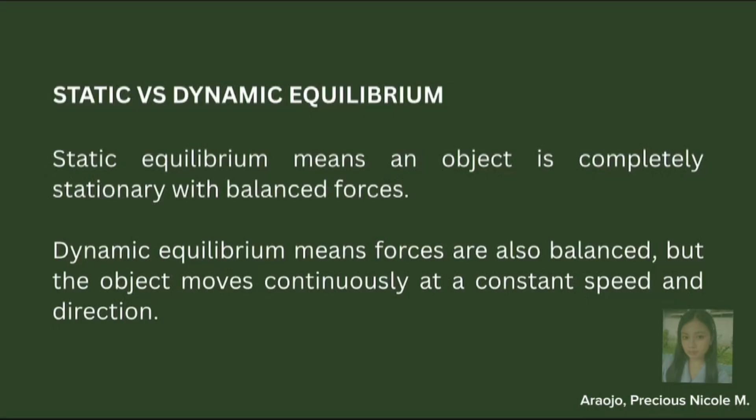While dynamic equilibrium describes an object that keeps moving in a steady way. All forces balance exactly, but the object travels with constant speed in an unchanging direction, like a car running at fixed cruise control or an elevator moving smoothly between floors. From a more detailed perspective, dynamic equilibrium is a balanced state where the vector sum of all applied and resistant forces equals zero. It is written as summation of forces equals zero. The result of this is zero acceleration, but velocity stays constant, meaning the object keeps moving steadily. It doesn't speed up, doesn't slow down, or drift sideways. Think of it as moving in perfect balance, unlike the common misconception that equilibrium means stop.

Then, translation means every single point in the rigid body follows identical and perfectly parallel straight paths. Here, the shape of the object doesn't bend, doesn't twist, and doesn't tilt. The angle between any two marked lines stays exactly the same. So the angular velocity and angular acceleration are both zero. In other words, when moving fast, the whole object shifts rather than spins. So what's the connection between the two?

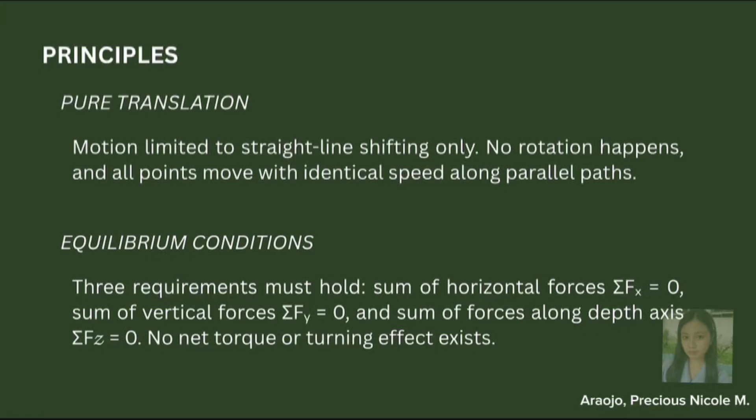Now, let's talk about the relevant theories, starting with the most basic idea. Newton's first law of motion or inertia explains how things move naturally. It tells us that any moving thing will keep going straight at the same speed unless something pushes or pulls it to change. In equilibrium, this means when the forces are perfectly balanced, the motion stays steady in ideal conditions, just like how a car stays at cruise speed when push and drag cancel each other out.

Moving deeper into how motion changes, this is Newton's second law of motion, which connects how hard you push to how much it speeds up or slows down. This means when the total push or pull equals zero, the acceleration also becomes zero. Or to make it easier to understand, this is the summation of F equals mass times acceleration. Now, it's clear that when the forces balance exactly, the speed and direction never change, forming the solid foundation for all equilibrium rules we use in analysis.

Aside from Newton's law of motion, there's also what's called D'Alembert's principle, wherein this principle bridges the gap between moving and stationary problems. It introduces a simple trick: treat the object's natural resistance to speeding up or slowing down like an extra force acting backwards. Once you add this imaginary force called the reversed effective force or REF, accelerating bodies act just like they are in static balance.

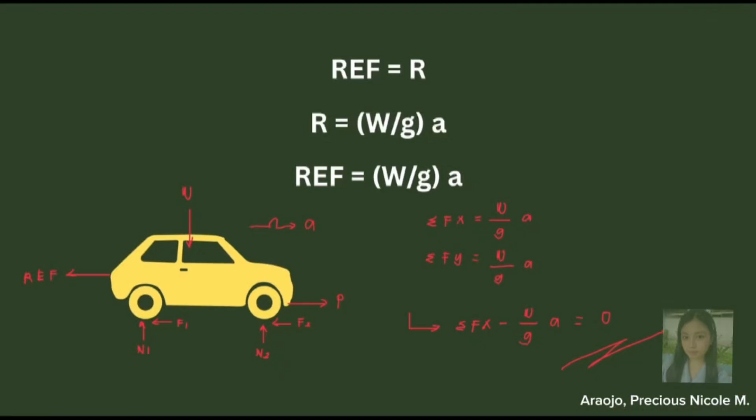So what we do is take all the horizontal forces, including the REF. Since it's to the left, it's negative, and we equate it to zero. This proves it's a dynamic equilibrium. As the slide says, by having an REF, the system can now be analyzed using dynamic equilibrium: summation of Fy equals 0, summation of Fx equals 0, and summation of moment equals 0.

So here are the steps and formulas. First is to draw the free body diagram or FBD. Second is to solve for the REF, or W over G times A, when it's not given. Lastly, use the dynamic equilibrium equations: summation of FV equals 0, summation of FH equals 0, and summation of M equals 0, which are vertical, horizontal, and moment.

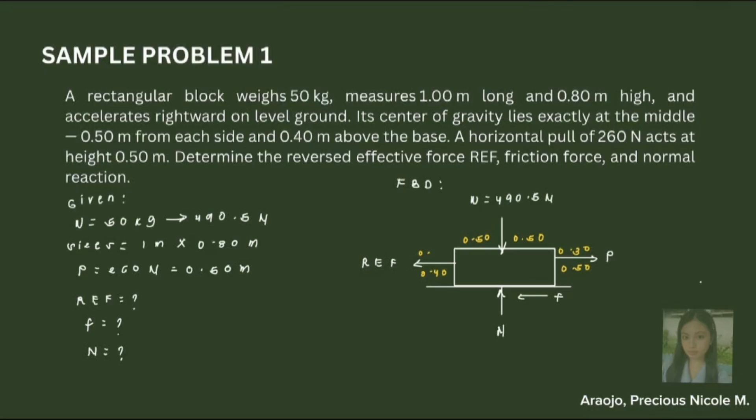Nasa gitna yung weight, so 0.50 tsaka 0.50 magkabilaan kasi 1 meters long. Itong REF, nasa gitna siya, so tig 0.40 sila. Ayan, pwede na tayo mag-solve.

Ang unang hinahanap dito ay yung reversed effective force o yung REF. Pwede natin gamitin dito yung summation of moment sa left side. So 260 times 0.50 meters minus yung REF, kasi pa-left, times 0.40, minus 490.5 times 0.50, equals to 0. REF equals to 288.13 newtons.

Pwede na natin makuha yung sunod, which is yung friction force, by using the summation of forces horizontal o yung summation of Fx equals to 0. Assume natin na to the right is positive. So 260 minus 288.13 minus yung friction na unknown equals to 0. Lipat-lipat lang natin, friction is equals to 28.13 newtons.

Lastly, yung normal reaction. Pwedeng-pwede natin siyang makuha kasi dalawa lang naman yung given na vertical forces. Assume na lang natin na upward is positive. Yung N, ima-minus natin siya sa 490.5 na weight equals to 0, lipat lang. So N is equals to 490.5 newtons.

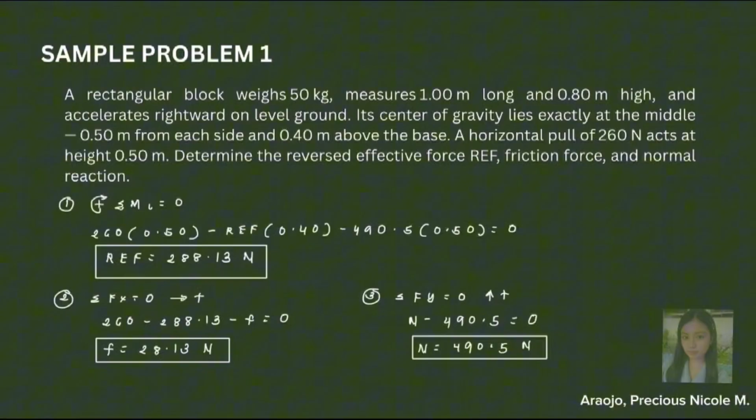For problem number 2, a uniform square block has a mass of 15 kg, is connected with a wire to another uniform square block, twice as the mass of the first and of the same material, as shown in the figure. Load P is applied to the 15 kg block to make it traverse a certain distance. The coefficient of friction of the big block is 1.5 and 0.75 for the small block.

Calculate the tension and REF. First, i-analyze muna natin yung question. Ang sabi dyan, yung first na uniform square block, ang mass niya is 15 kg. Then yung second block is twice as the mass of the first block.

Magkakaroon tayo ng equation. Let's say, ang symbol ng first block natin is MS, at ang symbol ng second block natin ay MB for the mass equation. Ang magiging equation natin dyan is mass ng small block times 2 is equals sa mass ng big block.

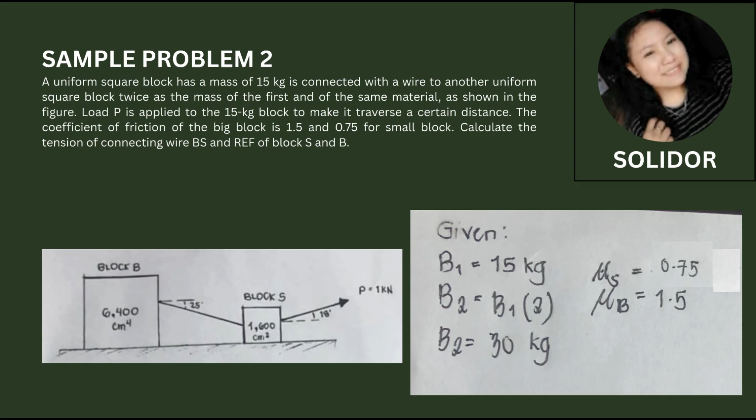Ang next natin gagawin ay yung FBD ng kada object. Unahin muna natin yung FBD ng block S o ang smaller block. Makikita natin dyan na may tension ng wire na pa-left, may 25 degrees. At meron ding load P na papunta sa right na may 18 degrees.

Dahil pa-right yung direction ng load P, ang magiging movement din is pa-right din. Ang acceleration nun is also pa-right, same direction with the load P.

Frictional force is opposite to the movement of the object. So, it's pointing left. And then, we can also see the weight of the block itself, which is pointing down. And then, the normal force is pointing up.

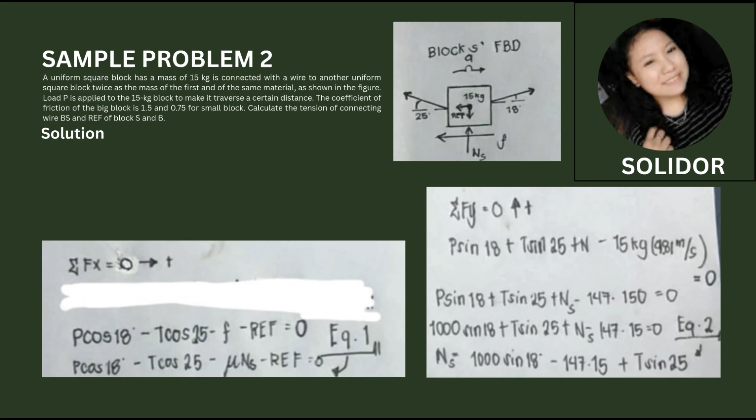Before we finalize this as equation 2, we can move out the other terms and leave the normal force. So this becomes: normal force equals 1,000 sine 18 degrees minus 147.15 plus T sine 25 degrees. That's our equation 2.

Now we can substitute equation 2 into equation 1. But first, recall that friction equals mu times normal force. Since equation 1 has friction in it, we substitute our equation 2, which is the normal force, 1,000 sine 18 degrees minus 147.15 plus T sine 25 degrees, into equation 1.

Our equation becomes P cosine 18 degrees minus T cosine 25 minus mu times (1,000 sine 18 degrees minus 147.15 plus T sine 25 degrees) minus REF equals to 0.

So we can simplify this term by term. We multiply first, and after computing what needs to be multiplied, what we get in the end is: REF equals 829.6563 minus T sine 25 degrees... T cosine 25 degrees minus 0.75 T sine 25 degrees. So that's our final equation for the FBD of our small block.

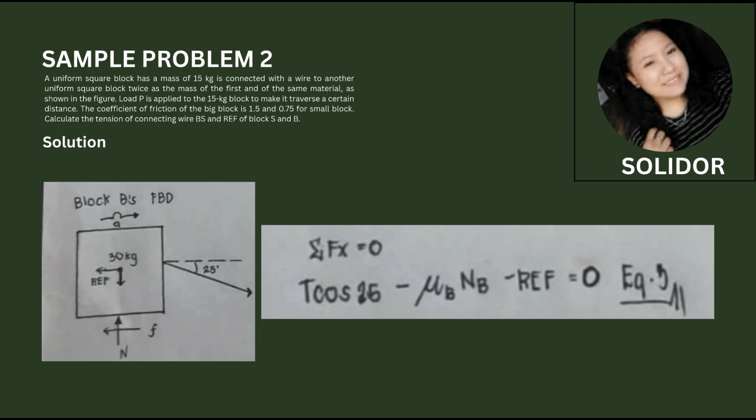Summation of forces horizontal equals to 0, right? Positive. So our tension is to the right. So, T cosine 25 degrees, cosine because it's attached to the horizontal. And then, minus friction, which is to the left, so negative. Then minus REF, because it's opposite, then equal to 0. Let's break down the formula for friction, which is mu times normal force. So that's our equation number 3.

Summation of forces vertical equals to 0, upward positive. Negative T sine 25 degrees, negative because the tension is downward. Plus normal force, because it's upward, so positive, minus the weight of the big block itself, which is 30 kg times 9.81 meters per second squared, equals to 0.

Let's simplify, moving the tension and weight to the other side. The normal force becomes equal to 294.3 plus T sine 25 degrees. That becomes our equation 4.

Now let's substitute equation 4 into equation 3. The equation for normal force we got from equation 4, we place into equation 3. Let's break down the friction in equation number 3 — that's mu times normal force — so we place there the normal force from equation number 4. So, T cosine 25 degrees minus mu times (294.3 plus T sine 25 degrees) minus REF equals to 0.

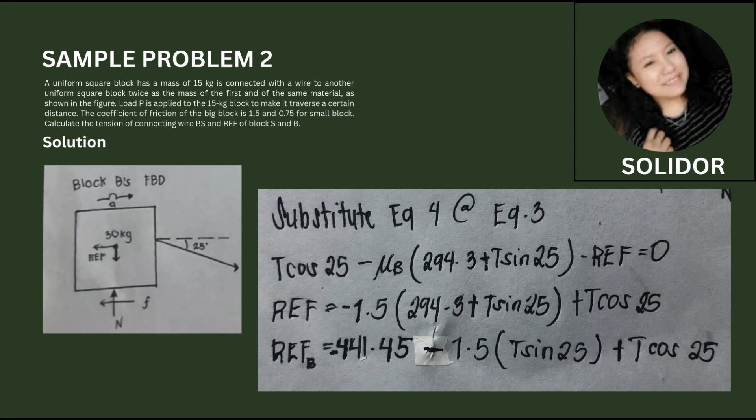Then, simplifying, the equation we get for REF of block B, or the big block, is: REF equals T cosine 25 degrees minus 441.45 minus 1.5 times T sine 25 degrees.

And then, yung nakuhang REF equation sa small block and yung REF equation sa big block, i-equate natin yon. I-simplify natin to get the tension.

So, equate mo natin. 829.6563 minus T cosine 25 degrees minus 0.75 T sine 25 degrees is equals to negative 441.45 minus T sine 25 degrees times 1.5 plus T cosine 25 degrees. And then, simplify, plug in sa calculator, ang makukuha nating value ng tension ay 849.8678 Newton.

Ayan, meron na tayong tension. Nakuha na natin yung value ng tension. So, pwede na nating substitute yung value nun sa mga REF equation kanina.

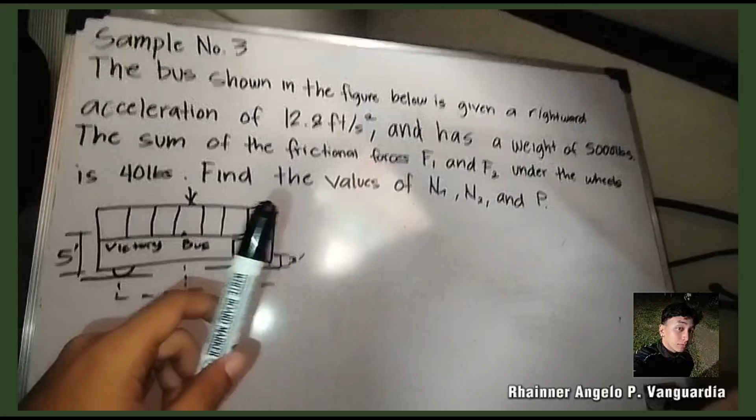So, the sample number 3 is the bus shown in the figure below is given a rightward acceleration of 12.8 feet per second squared and has a weight of 5,000 pounds. The sum of the frictional forces F1 and F2 under the wheels is 40 pounds. Find the values of normal force 1, normal force 2, and force P.

So, this is our figure. First, our acceleration is 12.8 feet per second squared. That's one of the givens. And our weight is 5,000 pounds. And the frictional force of F1 and F2 under the wheels is 40 pounds.

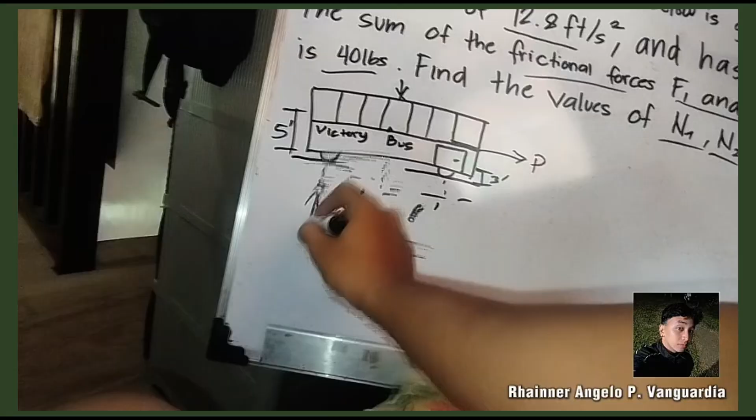So what we're going to find is the values of N1, N2, and force P. So, ang hinahanap dito is yung force P, and the normal force here, N1, and normal force 2, N2.

So first, we're going to write the given, so we can answer it carefully. So now, I will be writing the givens.

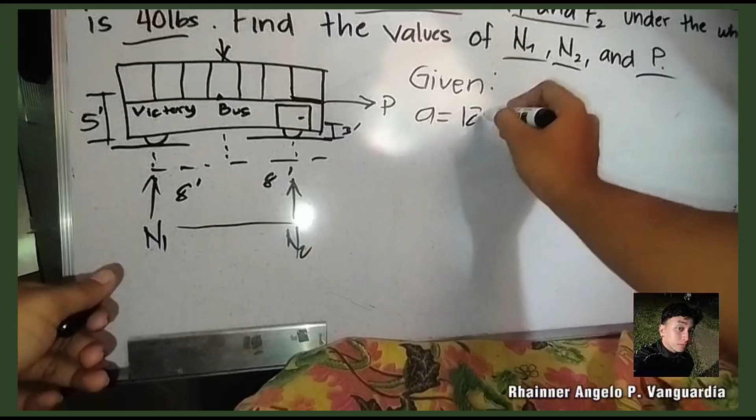So we have a given acceleration. Acceleration A is equals to 12.8 feet per second squared. And our weight is 5,000 pounds. The weight is 5,000 pounds. And the frictional force F1 and F2 under the wheels is 40 pounds. That is F total is equals to 40 pounds.

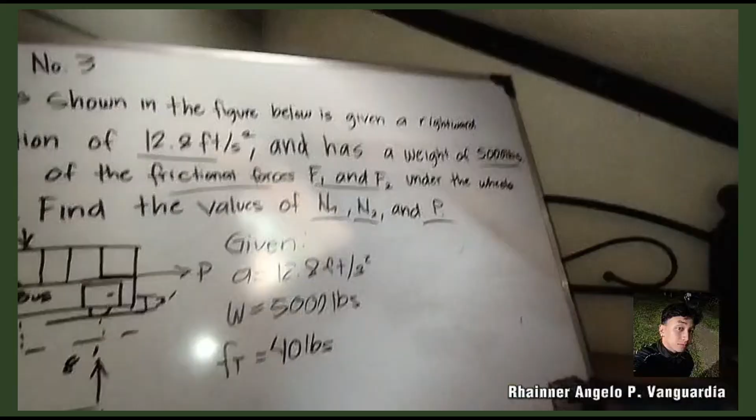So, anong missing natin is itong normal force 1, normal force 2, and force P. So, mag-draw muna tayo ng FBD. Drawing natin yung FBD nitong victory bus natin para mas ma-identify natin kung paano natin siya isosolve and mas maging malinaw.

Drawing natin. Pasensyahan nyo na yung drawing ko. Ito yung gulong. Yan. And ang ating normal, ang force P ay nandito. P, missing yan. Ang ating center.

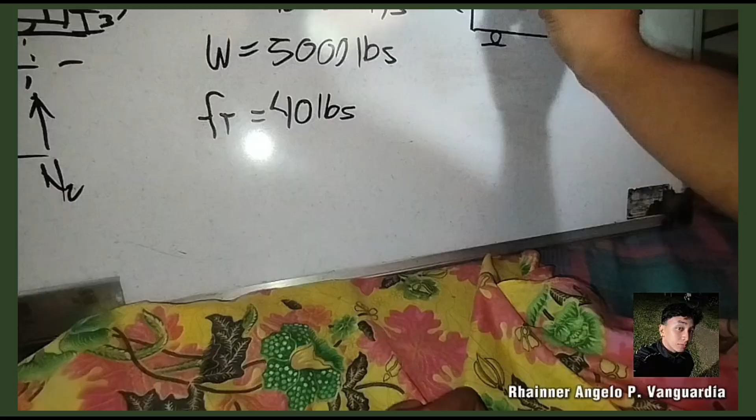Tapos yung ating ref. Alam nyo naman ano yung ref kasi na-discuss yun dun sa introduction ng concept. The REF. Tama. And normal force 2, normal force 1, frictional force F1, frictional force 2. Drawing natin lahat para makita natin kung paano natin siya isosolve. Ito yung gitna. Ito yung weight.

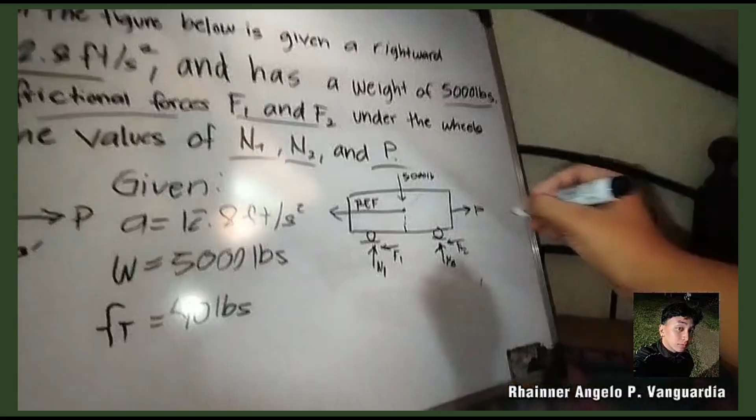5,000 pounds, and ang distance nito kailangan natin yan, given. So ang distance is 8. Tapos ang center is from the gulong is 5. So now meron tayong given. Meron pa pala dito, itong height ng gulong is 5. Now meron na tayong FBD and pwede na tayo mag-proceed sa solution natin.

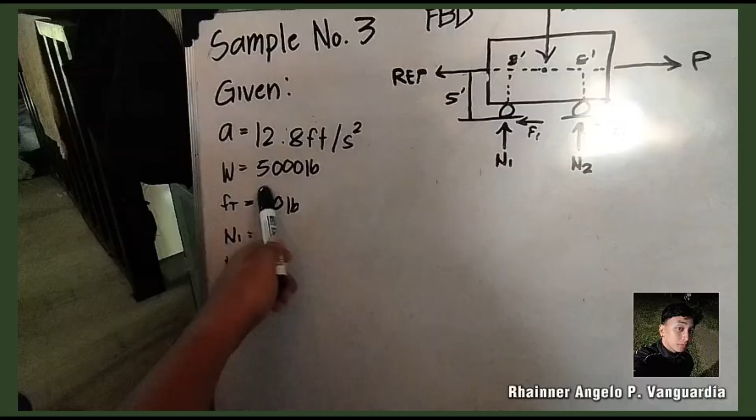So now I have rewrite the problem. Now this is the givens: 12.8 feet per second squared, 5,000 pounds, 40 pounds. So the missing is N1, N2, and P. So I forgot to add that we have given direction of acceleration, the gravity. That is equals to 32.2 feet per second squared. So magagamit natin yan para sa pagsosolve natin ng REF.

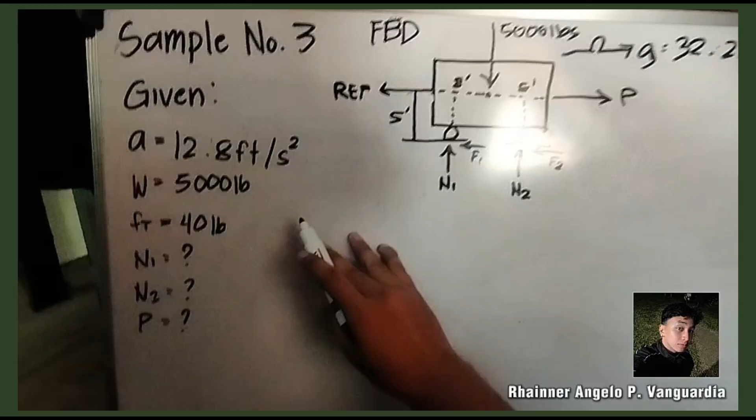So solving for REF, we're going to solve first REF kasi meron dalawa tayong missing na force. So first, because we have a given for REF, we're going to solve for REF. Solving for REF, so what is our formula? That happened to got discussed by the concepts, nandun yun, dun diniscuss yung REF. So REF is equals to weight over gravity times acceleration. So that's our formula for REF.

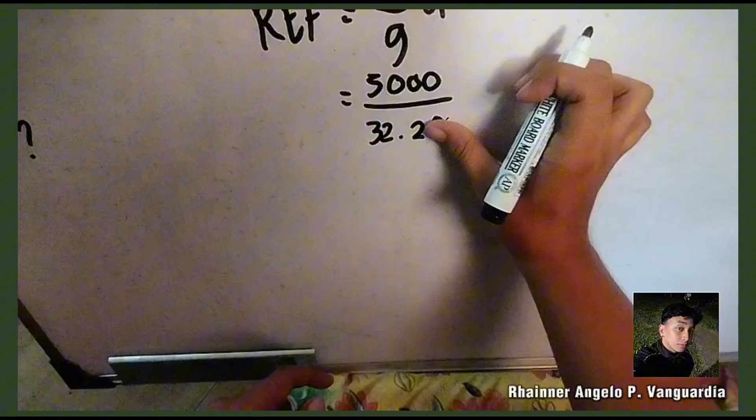Dahil nga meron tayong given na 12.8 feet per second squared, and ang gravity natin is 32.2 feet per second squared, kaya naging 32.2 feet per second squared dahil ito ay English. So now we're going to solve REF. Plug in natin yung mga itong mga given: 5,000 all over this one, the gravity, 32.2 feet per second squared, times acceleration. You don't need to write this na. Times acceleration is this one, 12.8.

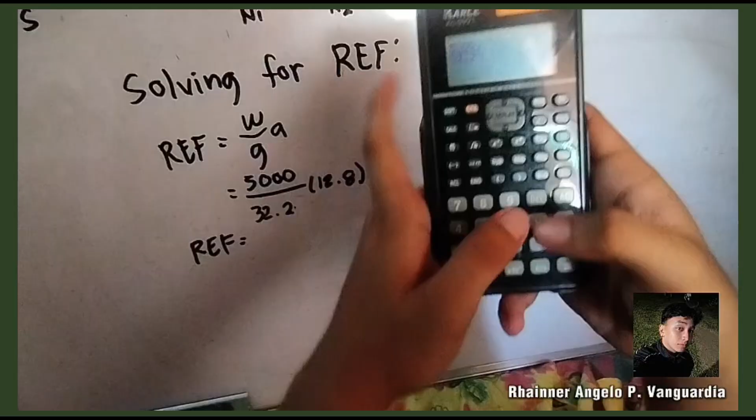So let's solve for REF. Guys, ilabas natin ang mga calculator natin para tayo ay makasabay. So now guys, let's continue: 5,000 all over 32.2 times 12.8. So ang sagot natin na yan is, kita ba, 1,987.58, round off. 1,987.58 pounds. So ayan, meron na tayong REF.

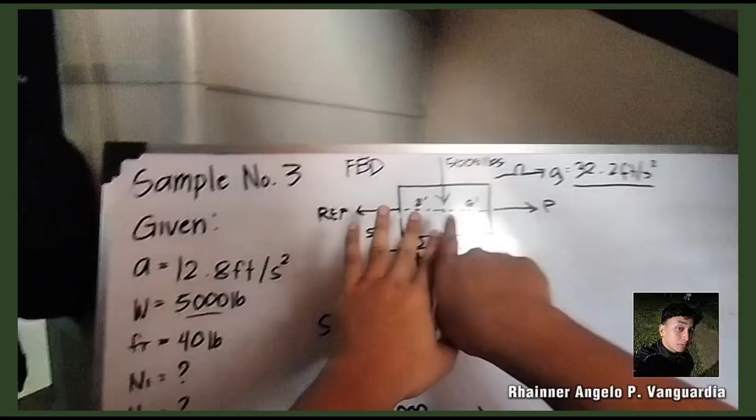Tapos lagi nyo palang tatandaan guys na ang ating REF ay salungat sa P, sa force P. Dahil siya yung negative, kumbaga, papunta dito sa kabila. Ang force P ay papunta doon sa same ng gravitation, ng acceleration direction. Yun yung ano natin, yung pagbibasa natin ng REF.

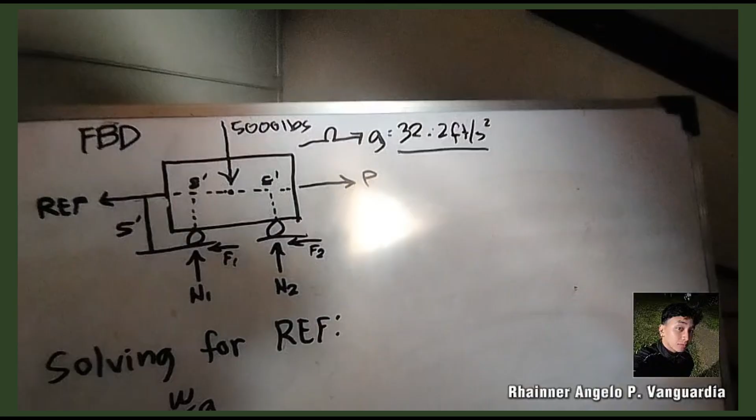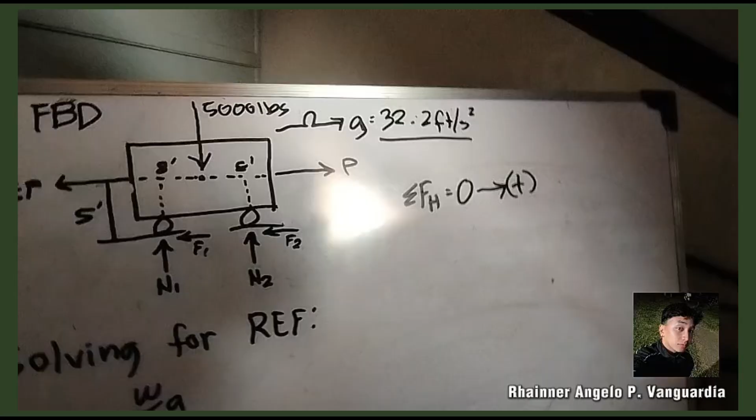So next naman is, dahil pwede na nating isolve ang force P kasi meron na tayong given REF, meron tayong given para sa frictional force, ang F1 at F2, pwede na tayong mag-solve ng force P. So let's say summation of horizontal force is equals to 0, to the right is positive. So ayan guys, so ang assumption natin sa horizontal is to the right is positive. So lagi naman ganun talaga guys, laging usually nasa to the right ang positive, depende lang din talaga.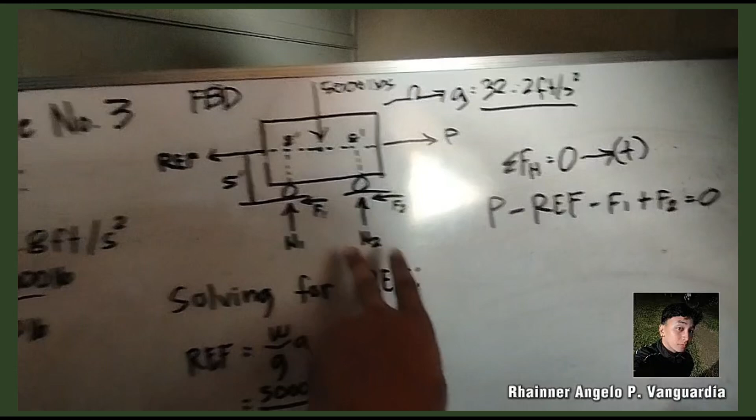So ngayon ang pag-i-input natin is, unahin natin tong P is to the right, force P is wala pa siya kasi siya yung hinahanap natin. Ang next natin, lagay natin minus REF kasi pa left siya, kaya negative REF. So ilagay muna natin yung mga ganito para mas madali nating maintindihan. So REF, tapos ang sunod natin yung frictional force, yung dalawang frictional force, pares may value yan, halos isa lang ang value niyan. Pwede natin siyang ilagay na minus F1 plus F2 is equals to 0. Kasi yun lang naman ang ating horizontal value. So plug in na natin yung mga value nitong mga to.

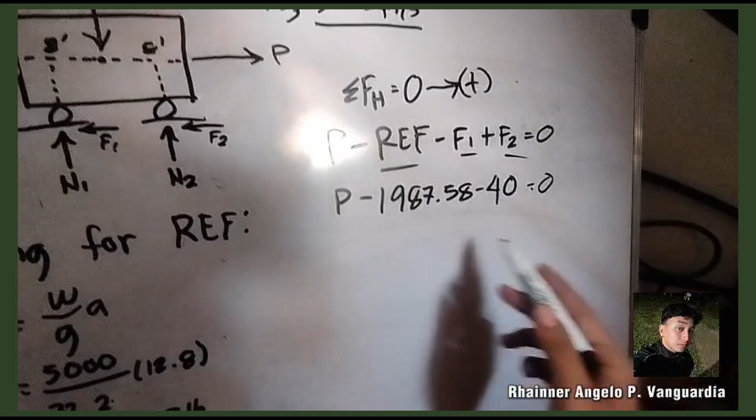So force P, kasi siya ang hinahanap natin, minus ang ating value ng REF is 1987.58, minus yung value ng frictional force, yung total force na 40 pounds. The value is 40, equals 0. So pwede nating ma-solve to. Shift solve na natin to. Pwede na nating shift solve yan. Lagay na natin sa mga calcu natin yan, ha.

So now let's solve for the force P: Alpha X minus 1987.58 minus 40, shift solve. So yan ang ating sagot, 2027.58, 2027.58 pounds. Ayan, meron na tayong value ng force P para dito, sagot natin sa force P.

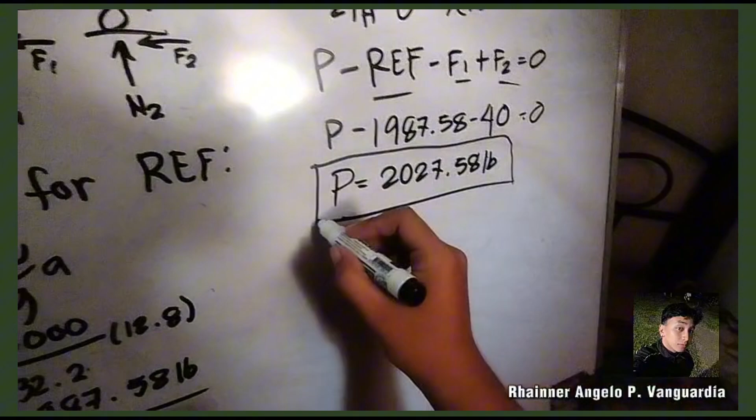Ayan. So let's solve for N1 or N2. So ano nga bang pwede natin gawin dito? Kasi dalawa yung missing na up na vertical force, isang N1, isang N2, tapos isa lang given nating weight na force is yung weight, yung 5,000 pounds. So what we need to do is pwede tayo mag-moment dito. Try natin mag-moment kasi di ba may makakancel doon? So pwede tayong mag-moment. So let's solve for moment.

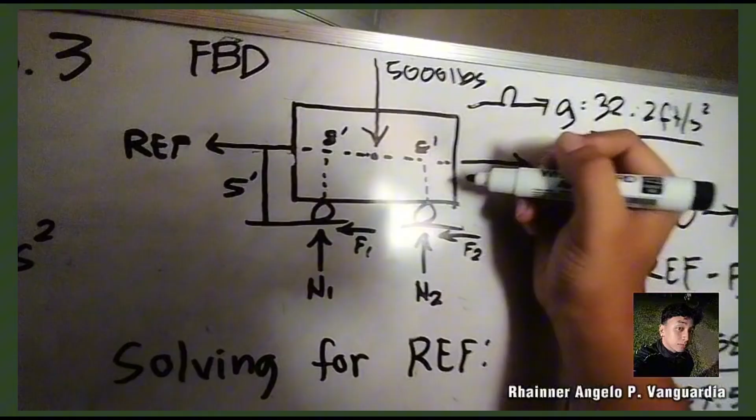So assumption natin na dito ay yung moment arm nya, kunyari solve natin dito. Kunyari yan yung A natin, force A. Kasi pag nag-moment tayo dito, hindi na masasama yung force P na dito. Wait lang, dito pala yun guys. Tama, dito.

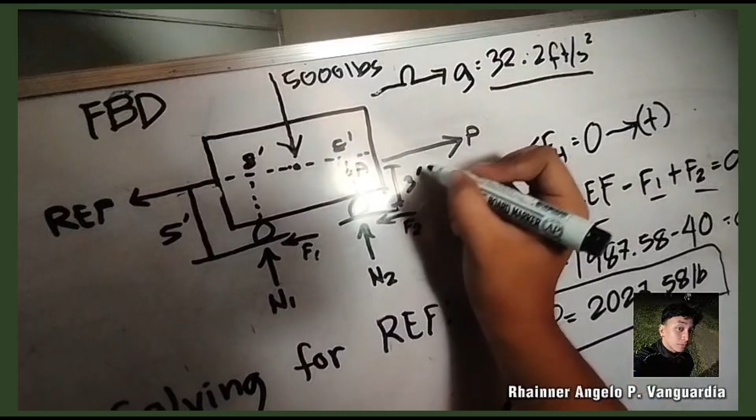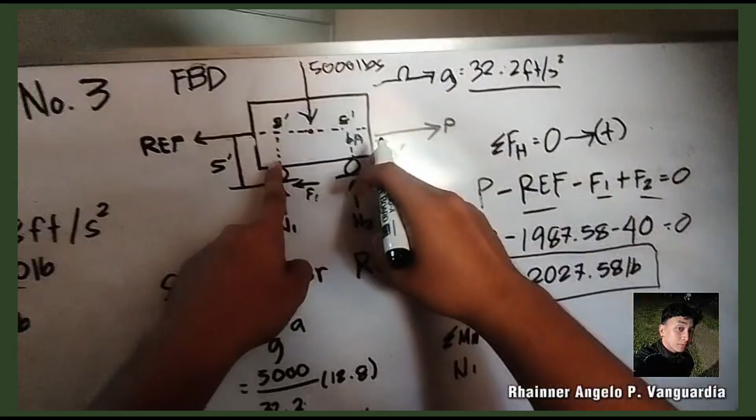We can start taking moments. Moment from A equals 0, clockwise is positive. Let's start with N1, since it's missing, so we can find it easier. For me, it's better to start with what's missing first. So N1, the moment arm from here, the distance horizontally is 16.

Next is F1 and F2. We can combine them like we did with the horizontal. What we get, since it's horizontal, is the vertical distance, which is 3. So we can write F1 plus F2, since it's positive clockwise, plus F1 plus F2. Let's direct solve to make it fit. 40 times the distance, which is 3.

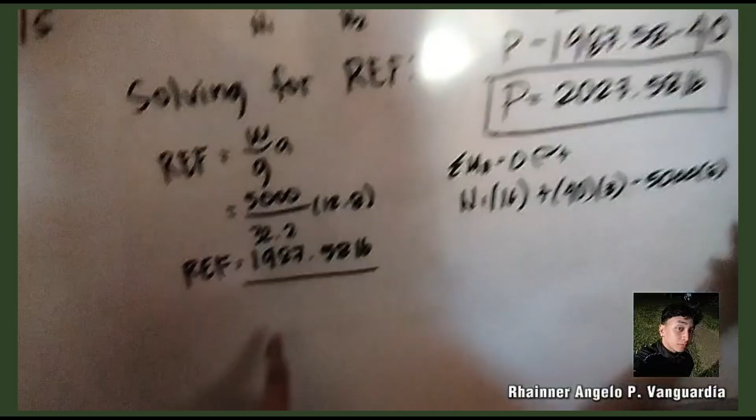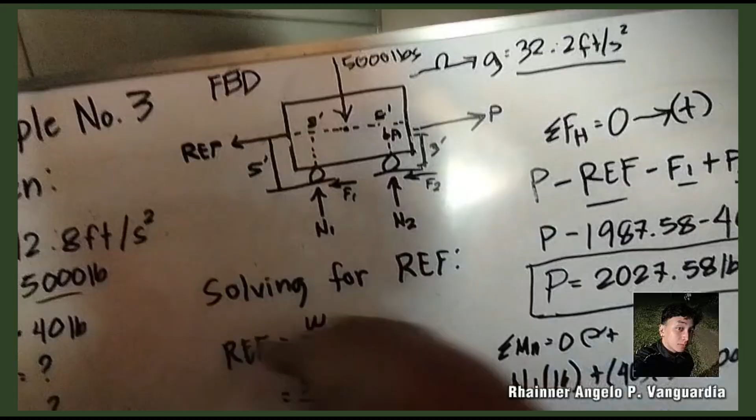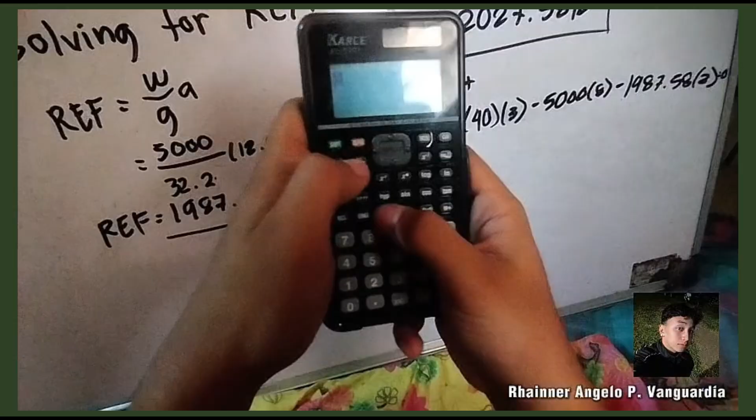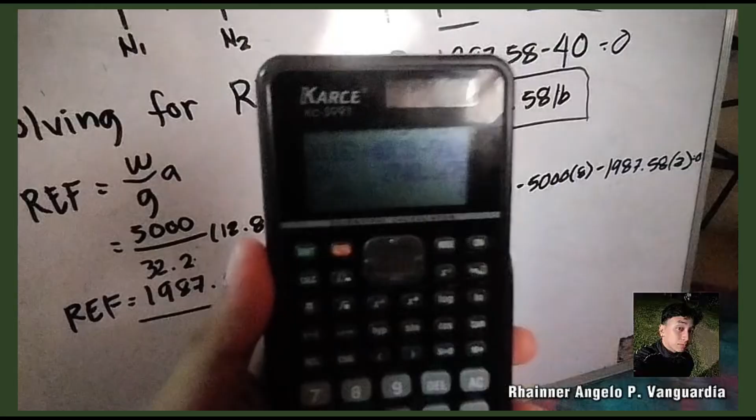So now we can solve for N1. Get your calculator out again. So N1 times 16 plus 40 times 3 minus 5,000 for the weight times 8 minus REF, 1987.58 times 2. We can shift solve to get the answer for N1. So the answer for N1 is 2,740.95 pounds.

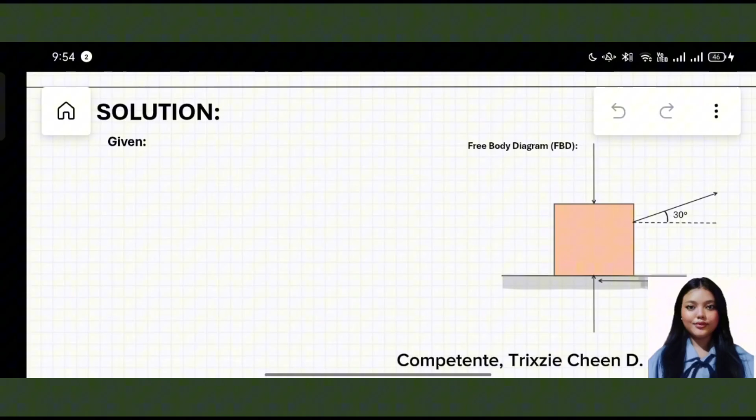Okay, so here's our solution. What do we usually do first when solving these kinds of objects? Of course, we get the free body diagram. Let's locate and identify the needed forces that act upon the object, which is the crate. This downward arrow at the top of the crate is the weight. We're familiar with that. And then next is this upward one, the normal force N.

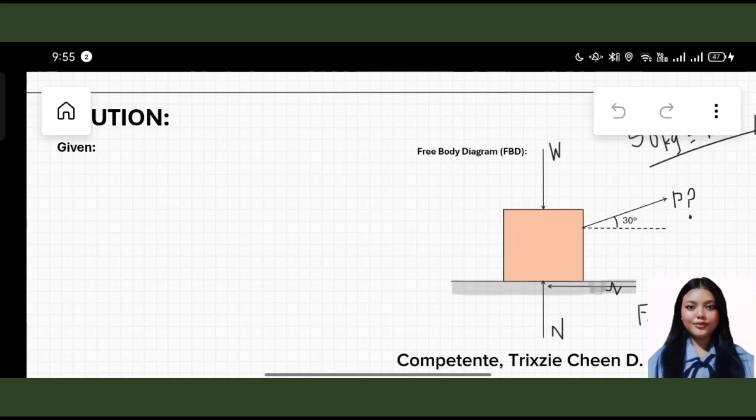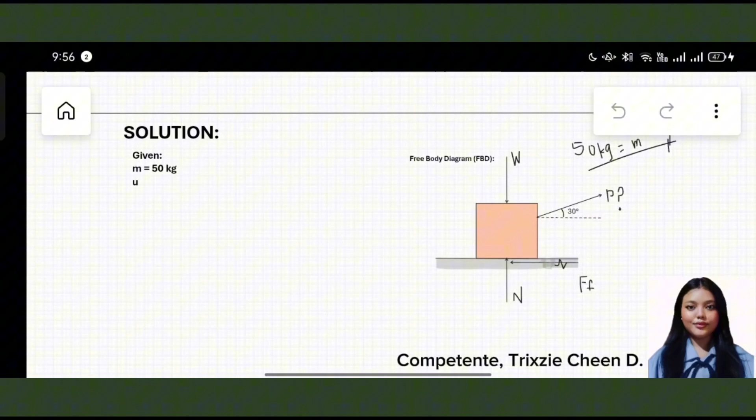Okay, back tayo sa problem. So ano daw yung mga given natin dito? A 50 kilogram crate. Sabi nga natin, diba, yung 50 kilogram na yun is not yung weight niya, but yung mass niya. So lagyan natin, mass is equals to 50 kg. So ano pa? Yung coefficient of kinetic friction natin, which is 0.20. Ano pang next? May nabanggit dito. Pakita natin, taas tayo sa problem ulit.

Sabi dyan, the crate moves with a constant velocity. So ano ba ibig sabihin pag may constant velocity yung isang ganyan? Ibig sabihin, constant velocity is equals to 0 acceleration. So ilagay natin sa problem natin na the given acceleration is 0 due to its constant velocity. Acceleration is equals to 0.

Pero may isa pa naman tayong given, yung gravitational force, which is gravity, yung 9.81 meter per second squared, no? Okay, ano pa next? Velocity daw, constant. So sige, hindi na natin ilalagay yun since nilagay naman na natin na yung acceleration is 0.

Okay, let's go on now with the problem solving. So sabi dito, yung summation of forces is equals to mass times acceleration.

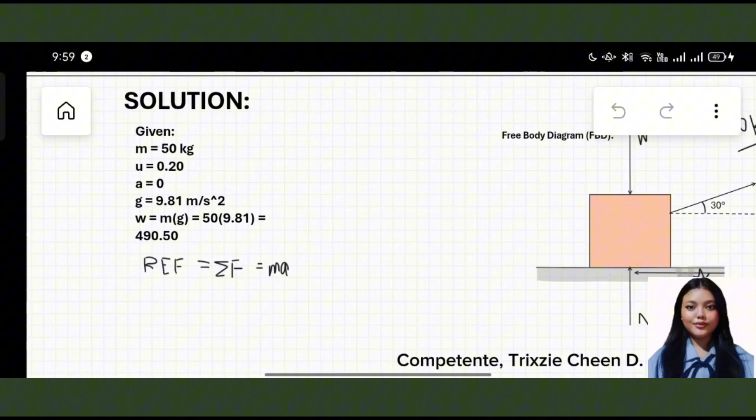50 times 9.81 is equals to 490.50 Newton. Nalagay natin yung unit.

I-solve natin yung summation of forces na to. Summation of forces is equals to mass times acceleration. Sabi natin diba kanina, yung acceleration natin is 0. Tapos yung mass natin is 50 kg, which is given naman diba. So times 0. Ang summation of forces natin is equals sa 0, kasi nga in equilibrium tayo, diba.

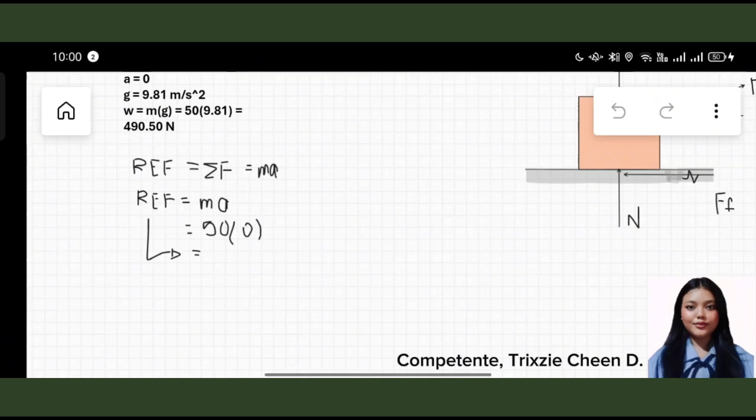So ano tayo? Ano na next na isa-solve natin? Nakuha natin na yung summation of forces is equals to 0. So saan tayo mag-start, siguro tayo with summation of forces along Y, no? Summation of forces along Y is equals to 0. So ano ba mga given natin? Vertical Y, nandito yung normal force natin na N.

No? Nandito din yung weight natin, which is downward, which is ano nga ulit yun? 490.50. Okay, sulat natin. 490.50. Oh my gosh, okay ulitin natin siya. 490.50. Okay i-type na lang natin para mas maganda siya tignan.

Okay so N minus, lakayan ko, N minus 490.50, yung weight natin, pababa. Ano pang next? Okay yung force P na hinahanap natin. So nasa horizontal yung nakadikit yung angle, diba. So ito siya, cosine, so pataas plus P sine 30 degrees equals 0 natin.

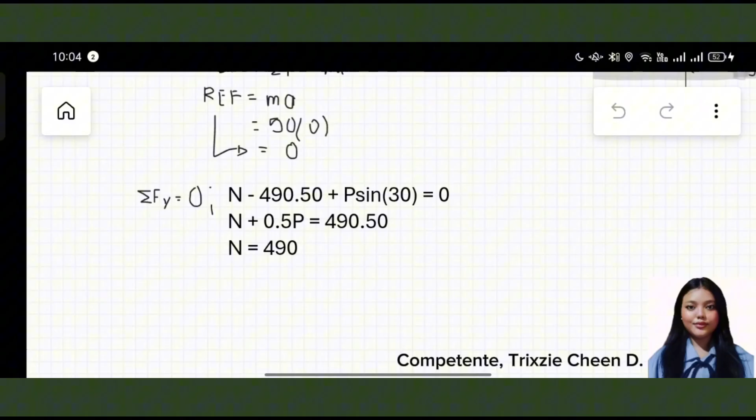Okay, solve siya natin, no? So N plus, ayun yung cosine 30 natin is... sine pala to rather, sorry, kasi nga diba vertical yung hinahanap natin. So sine 30 degrees is equals to 0.5, P. 0.5P. Tapos i-equals na natin siya sa 490.50. So para makuha talaga natin yung N, gawin na lang natin siyang N is equals to 490.50 minus 0.5P. Okay, equation 1 to, no?

Okay, lagyan natin siya, equation 1. Equation 1, oh my gosh. Okay, equation 1 to. Okay, pangit lang siya, pero yun.

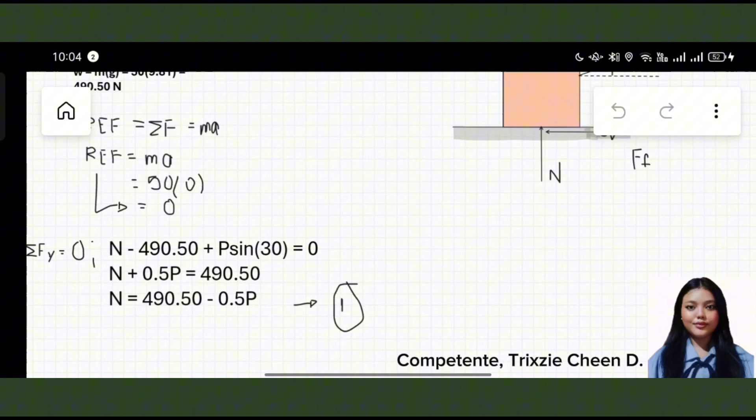Next na gagawin natin, anong next na gagawin natin? Siguro makuha natin yung frictional force, no? Okay, dito natin lagay. So F, nasa na tayo? Dito sub tayo, wala, mali, wait lang. Check tayo dito. So F, F na lang, para mas neat yung mag-isulat natin. F, kaya natin. Pero naman malaki. F is equals to, so paano ba natin makuha yung F na yan? Diba sabi doon, mu, okay sorry, wala akong mu, times the normal force.

So F is equals to, ano bang mu natin? 0.20. Ano ang N natin? Base dito sa nakalagay na to, 490.50 minus 0.5P. Okay, so actually pwede naman natin yan siyang, ayan na yung equation 2, pero i-simplify pa natin siya. Okay, F is equals to 98.1 minus 0.1P.

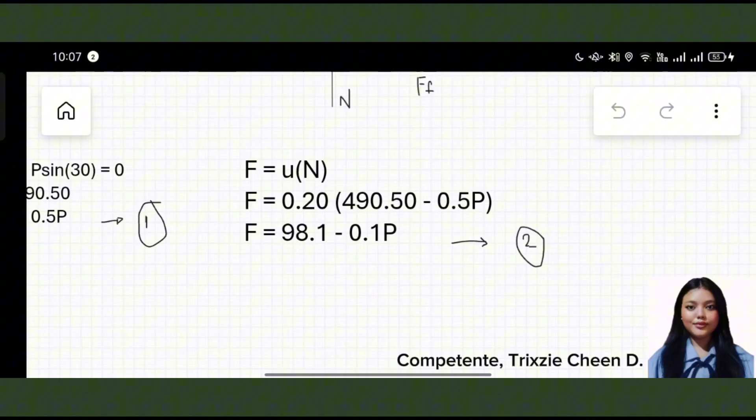Okay, so anong next natin na gagawin? Pwede na tayo mag-horizontal forces, no? Okay, let's go with that. So horizontal forces, dito tayo sa baba ng summation of vertical forces. Mag-draw tayo dito ng horizontal, summation of horizontal forces rather. Summation of forces along X is equals to 0.

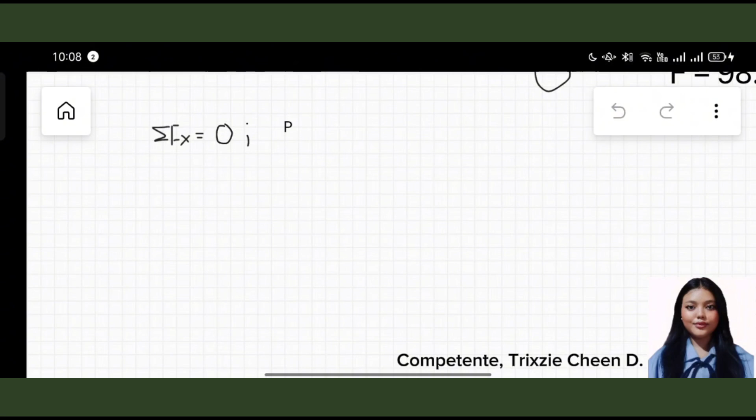So anong mga forces along X natin? Yung P natin, no? P cosine 30 degrees. So paano siya? Pa-right, so positive. Okay, type natin. Wait lang guys. P natin cosine 30 degrees. Ayan, sugisog natin para makitang-kita. Ay, P cosine 30 degrees.

Ano pa? Yung frictional force natin na F, no? So tingnan natin, pa-left siya, diba, kasi nga opposing force siya sa force P. So minus F, yun lang diba. Equals 0. Ay, equals 0.

So mag-substitute tayo, kasi pwede naman yun natin gawin ng substitution. Kasi kanina nag-substitution din tayo diba, pagkuha ng F. So ganun din gawin natin pagkuha ng P. Okay so P. Anong cosine 30 degrees? Cosine 30 degrees is equals to 0.8660.

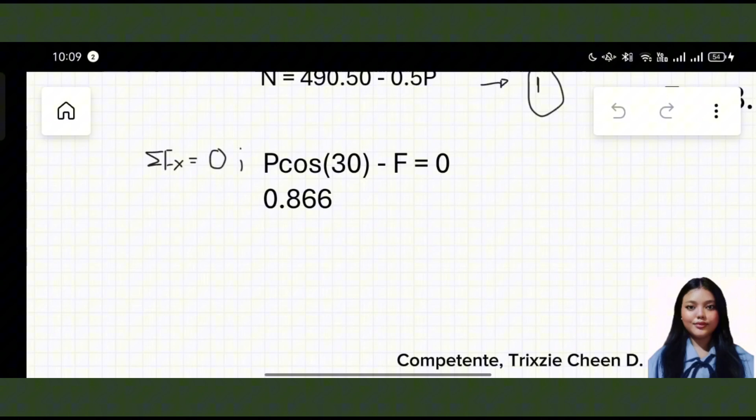0.8660 minus yung F natin. Anong F natin ulit? 98.1. Minus 0.1 P. Actually, makukuha na natin yung P natin dito, kasi nakalimutan natin yung P. Isang ano na lang yung hinahanap, which is yung P na lang, diba?

Kasi nga, next substitution tayo. I-simplify pa natin siya. So, 0.8660 P, rather magiging plus siya kasi times na yun, no? Minus and negative, positive 0.1 P is equals, so dahil negative na siya, i-transpose na natin yung 98.1 para maging positive.

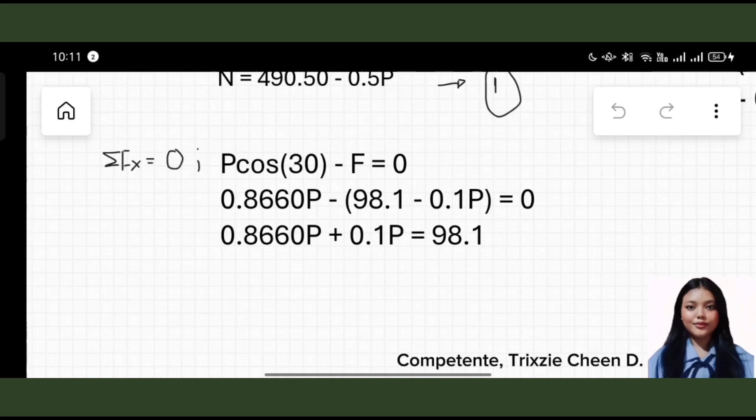Next. Okay, pag-plus na natin, total, pares din naman niyang may P na. So, magiging siya 0.96... 9660 P is equals to 98.1.

Actually, pwede na i-solve eh. Pwede na siya i-solve sa calculator. Shift solve pwede, pero ano na lang yan eh, 98.1 over 0.9660. So, i-calculator natin para makuha na natin yung P. 0.9660... 98.1 over 0.9660 is equals to, so dapat ang kalalabasan dyan ay 101.55.

So, i-finalize natin yung final answer P natin. Lagay natin final answer. So, ang final answer natin, just like we said, ay P is equals to, kaya natin para kita, 101.55. Anong unit niya? Newton, no? Okay. Ayan yung final answer natin. Box natin siya para kita ng lahat kung ano naging final answer natin. Natakpan siya. Okay, ayusin natin. Ayan. Yan. Ayan na yung final answer natin.

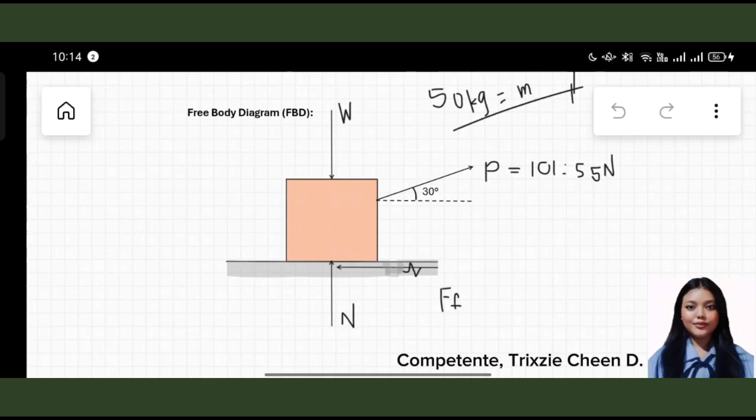So, let's look back dito sa FBD niya. So, dito daw pala, kinakailangan, tingnan natin, i-erase natin to. So, sabi pala dyan, kinakailangan ng P which is equals to 101.55 Newton para mapagalaw in constant acceleration, constant velocity itong 50 kilogram na crate natin. So, dahil constant velocity yung crate natin, yung resultant external force, which is yung ito yung kinompute natin kanina, equal siya sa 0. Hence, the crate, ma-justify natin that the crate is in dynamic equilibrium of translation. So, yun lang po. Thank you!

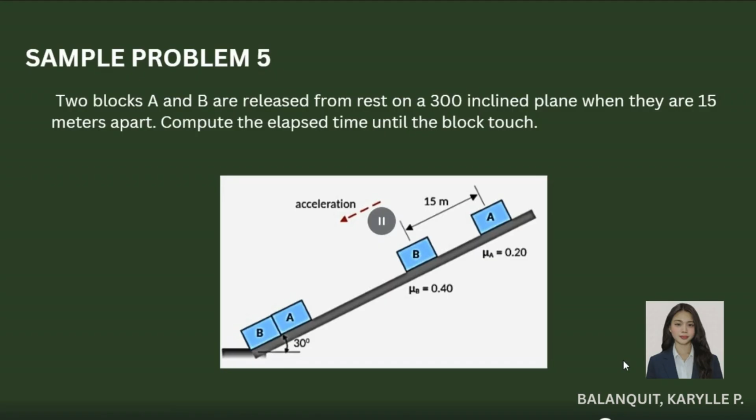So, normal force lang. So, ang mangyayari, yung friction ni A is equals to coefficient of friction times the normal force of A. So, substitute mo lang. So, 0.20 times W cosine 30 degrees. Ang lalabas na sagot ay 0.17 W. Next natin. Ang lumabas is 0.17. So, ang sabi dito, anong hatak pababa? So, si W sin 30 degrees, anong pumipigil? Yung friction. Yung friction natin yung pumipigil. So, W sin 30 degrees, lang.

So, the W sin 30 degrees minus the friction at A is equal to W over the gravitational acceleration, 9.81, times the acceleration at A. Substitute lang, magiging 0.5 minus 0.17.

So W can be cancelled out from the equation. Cancel W. Important ito kasi kahit hindi mo alam yung mass or weight, masasagutan pa rin natin. So, 0.33 is equals to acceleration at A over 9.81.

So ang makukuha nating acceleration at A is equals to 3.24 meters per second squared, pababa, downward. So si A, mabilis, 3.24 per second squared yung bilis na dagdag niya.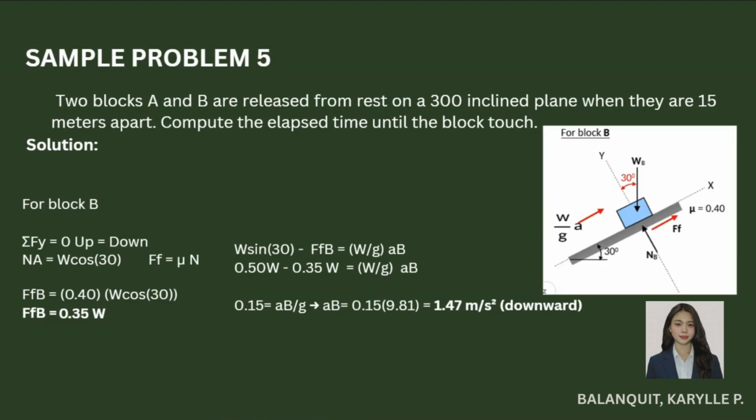So SA is equals to 1/2 times the acceleration at A. Wait lang, mas natin para makita nyo. So yung SA is equals to 3.24 T squared, is equals to 1.62 T squared, ito yung equation, magiging equation mo natin.

And yung B naman, substitute, nakuha natin is 0.748 T squared, which is the equation 2. So combine natin sila, ilagay natin yung equation, substitute equation 2 in equation 1. So ang magiging sagot natin is 4.13 seconds.

So may tatlong bagay lang tayong need tandaan dito. Una is yung FBD plus friction para makuha natin yung acceleration ng bawat block. Next is yung cancel si W kasi hindi naman natin alam ang actual weight here sa ating problem na to. Then yung last is yung kinematics with gap, which is yung SA is equals to SB plus 15. So SB is equals to SB lang. So yun na yun, mas mabilis equals mas maliit na friction.

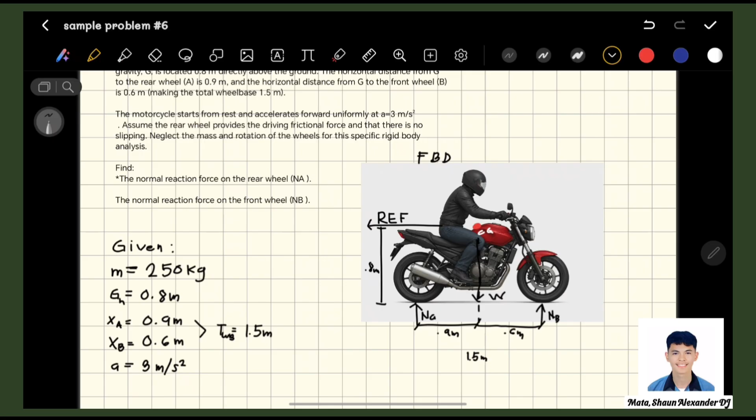The motorcycle starts from rest and accelerates forward uniformly at 3 meters per second squared. Assume the rear wheel provides the driving frictional force and there is no slipping. Neglect the mass and rotation of the wheel for this specific rigid body analysis. Find the normal reaction force of the rear wheel and the normal reaction force of the front wheel.

So the given in this question is total mass daw ng combined rider and its motorcycle is 250 kilograms. Tapos, center of gravity on point G is 0.8 meters above the ground. This distance ng center of gravity papunta sa rear wheel A is 0.9. Tapos sa front wheel base naman is 0.6. The acceleration motor is 3 meters per second squared.

So ang sabi rito sa problem na rear wheel ang bigay ng driving force at wala raw slipping or pag-blast. So ang hanapin natin is the rear wheel normal force at saka front wheel normal force.

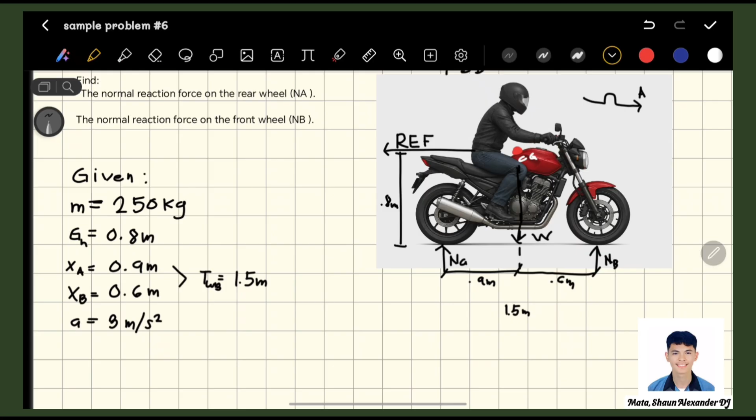Tapos 0.8 meters from ground papunta sa center gravity. Tapos normal force at A papunta sa center gravity is 0.9. Ano lang sinabi doon. Yan, ito na pinaka-ano niya, free-body diagram.

Kaya pwede natin siya sagutan. Una is REF, hanapin natin, kasi since may acceleration, kaya natin kunin ng REF. So REF is equal to mass times A.

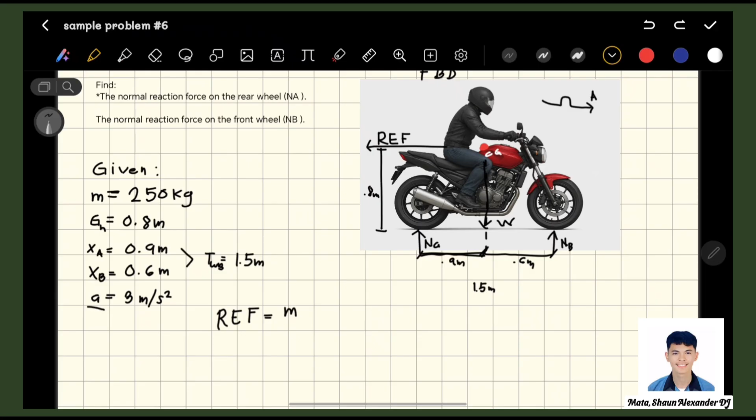Mass times A pala. REF is equal to mass na 250 times 3 meters per second squared. REF is equal to 750 Newton. So itong force na to, itong humahatak na to, is 750.

Save natin yan. So dahil may REF na tayo, pwede na tayong mag-solve ngayon ng mga forces nito, kasi nakuha na natin yan.

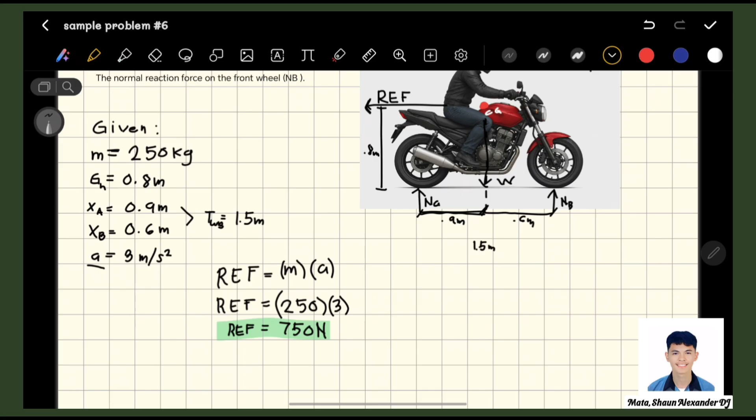Now solve na tayo. Since walang vertical acceleration, so the sum of vertical force is equal to 0. Dahil wala vertical acceleration, ang summation of forces in y is equal to 0. So meaning yan, ang makukuha natin dito is itong NA, W, and itong NB, or normal force at A, normal force at B.

So NA, positive, yan, upward positive tayo. NA minus W, or weight, plus NB is equal to 0.

Ang weight natin is weight is equal to mass times gravity. Bilisan solve na tayo: 250 times 9.81 is equal to 2452.5 Newton.

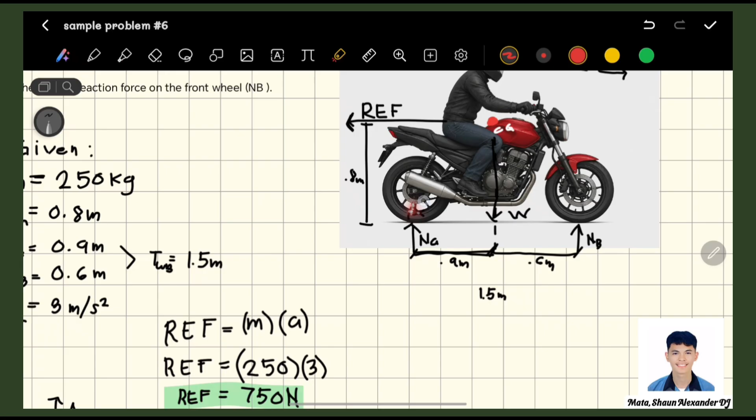Equation number 1. So next step natin is moment. Tayo magmo-moment, kuha tayo ng moment at point A. Dito tayo kukuha. Bakit point A? Pwede naman point B din, pero feel ko mas madaling kumuha ng moment dito, so A tayo.

Dito na tayo mag-solve para kita natin. So summation moment at A is equal to 0, and counterclockwise positive. Ang una natin reaction is NB.

NB times itong distance which is, ay 1.5 pala, sorry may mali. Ito siya sulat na. Tapos weight naman niya, minus kasi ito, clockwise siya. Clockwise kasi pababa, so it's weight times 0.9 meters.

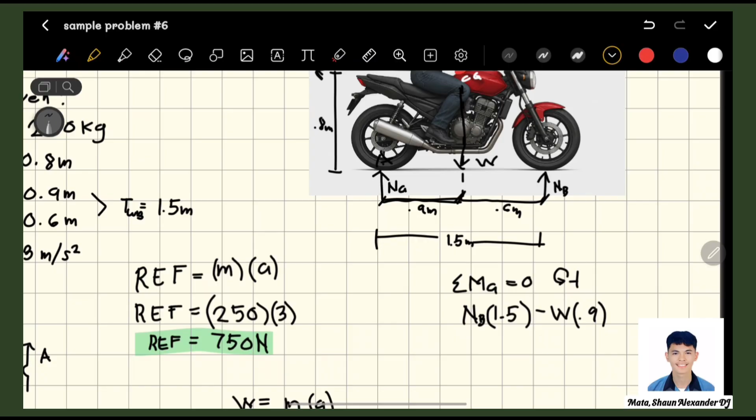Tapos yung REF. Dahil pag ganito siya, magiging counterclockwise, so positive. REF times ano niya, which is 0.8 meters, equals to 0. Yan, nakuha na natin.

Tag na natin ang mga value nito. So NB natin, wala pa yan. 1.5 minus ang ating weight, which is 2452.5, times 0.9 meters, plus REF, ang REF natin ay 750 times 0.8. Naubusan na tayo, solve na natin: NB is 1.5, minus 1607.25, equals to 0.

Ito, nakopit natin yan. Ito naman pwede natin ito ulit lipat: 1.5 NB equal to 1607.25. Na-move natin yung constant, tapos naging positive siya. So divide natin ito sa 1.5 para matanggal yung NB natin. So giging equals na. NB is equal to 1071.5 Newton.

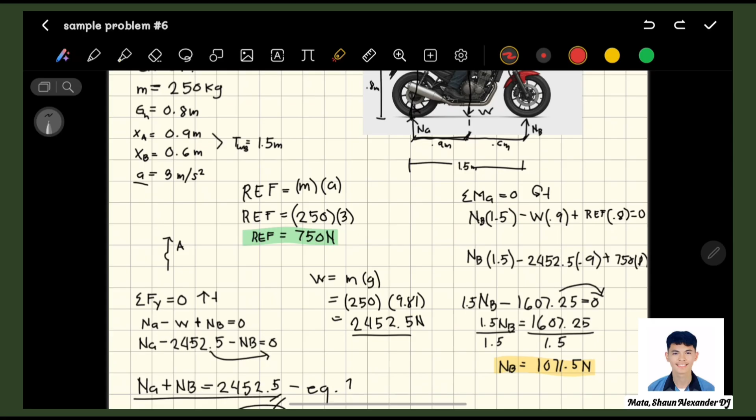Yun ang complete solution ng accelerating motorcycle. Ang pinaka-importanting concept dito is yung draw FBD correctly, like this, apply force equilibrium, apply moment equilibrium, and understand weight transfer due to acceleration. Yun yung paglundo dito.